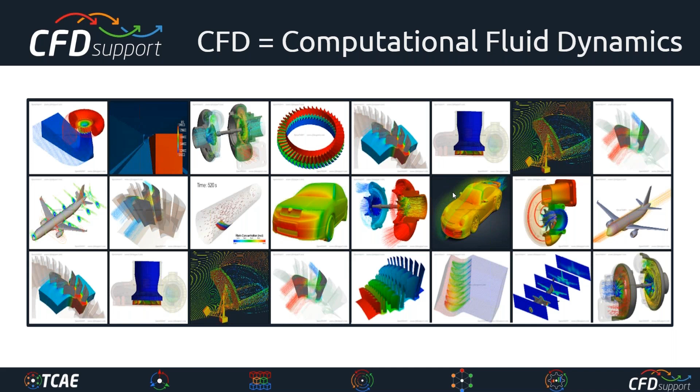I have to say we have a very strong team. In the last year, we have worked hard - in a matter of fact, very hard. When we met some difficulties, we worked even harder, and throughout the COVID pandemic, we worked harder still. These guys are very smart, and I'm proud of them. It's an honor for me to work with them. I don't know how they do it, but they did it, and it's here.

I'm happy to show you this TCAE, which is a comprehensive CAE engineering simulation environment. I guess you know that before we maintained TCFD, which now becomes a software module of TCAE. TCFD was very successful, and what had worked so well in TCFD now of course remains in TCAE.

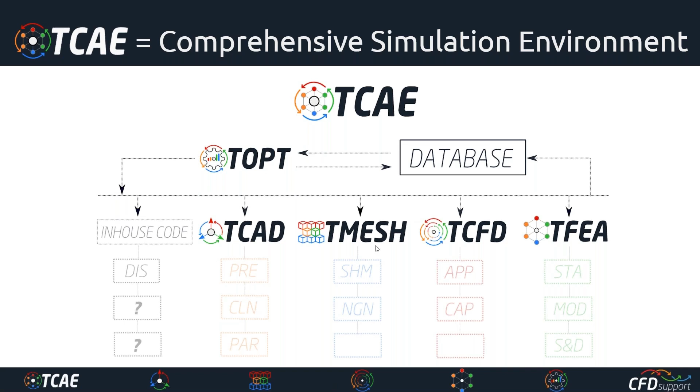Okay, it tells me now the webinar is full, so no one else can attend. So yeah, okay, it doesn't matter. Okay, let's continue.

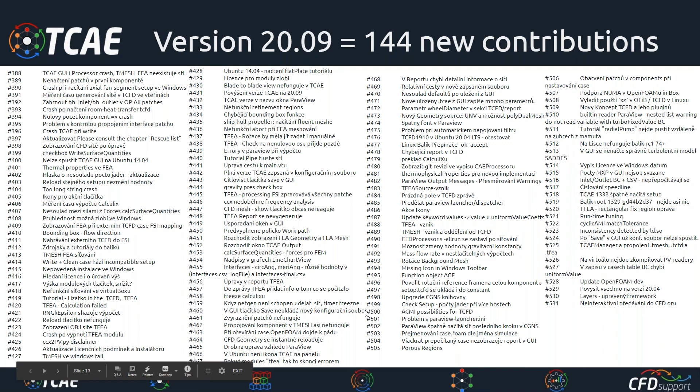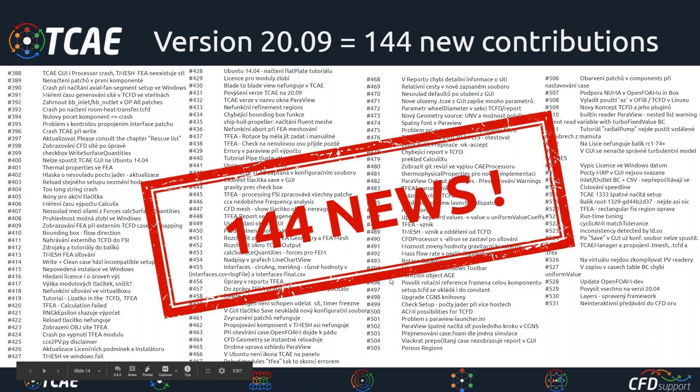Since the last release, which was version 1910, we have made so much work and so many little projects that we can't go one by one over it. So the list is very long. The development process has broken into 144 different projects. Some of them were just small issues, some of them were nightmares, but anyway, there are 144 new things, and I believe it's very useful. Maybe what's more important, TCAE is much more comprehensive than it was before.

As already mentioned, TCAE has a modular character, and the user can choose between TCAE modules and, if needed, combine them with many other software pieces available in the market. For example, you can take an external mesh from Pointwise and use it with TCFD. Or you can design a pump in CFturbo, create the mesh with TMESH, use TCFD, and do, for example, modal analysis in TFEA. Or you can run an optimization loop, creating the geometry in a CAD system, use, for example, GridPro for hexa meshes, then use TCFD and together use FSI with TFEA.

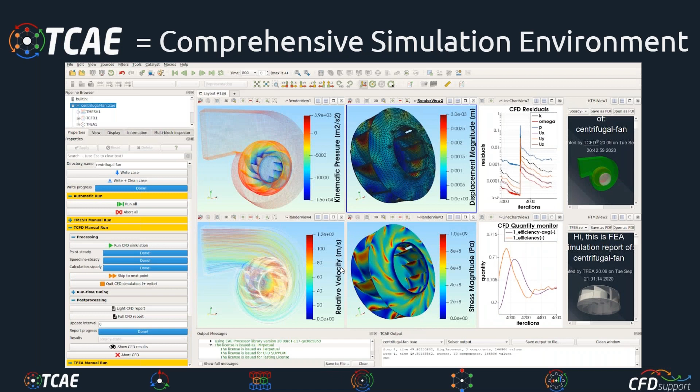I'll continue with, okay, this is the graphical interface again. I think there will be some other information about it later in the webinar.

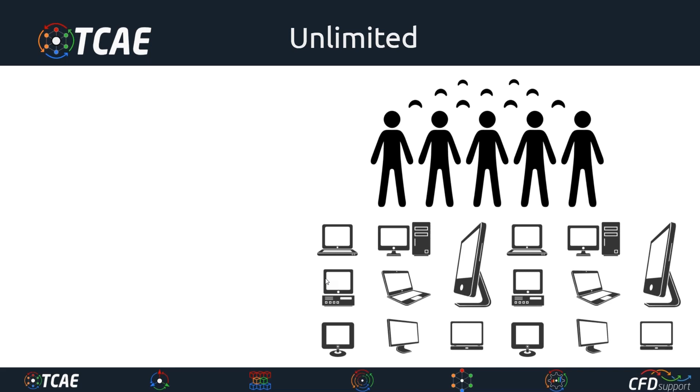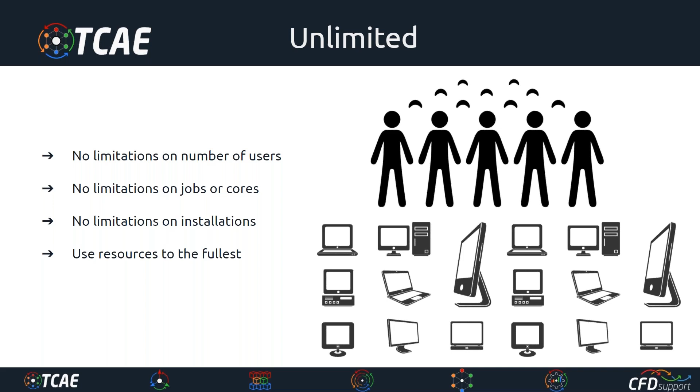TCAE is unlimited. It's definitely a big thing. There are no limitations on number of users, jobs or cores. There are no limitations on hardware installations. So it's very, very useful, and it can scale all your potential according to your resources. So the users can use their resources to the fullest. It's very important, and that means really a lot for our users, I have to say.

Okay, TCFD is definitely accurate. Accuracy is very, very important for us. We have clear focus on accuracy. TCAE is always aimed at particular applications, especially turbomachinery, especially external aerodynamics. Those are the two very best of TCAE, and we have created many benchmarks, and we are ready to prove that it's very, very accurate.

As I mentioned before, we don't believe in general purpose code. We don't believe that some code can do all the simulations of everything, or anybody can do anything. It has to be focused, and TCAE is definitely focused on special simulations. We are obsessed with accuracy. We have done a lot of benchmarks in the past, and we are ready to show them, and they're mostly available, and some of them will be made available still. And we believe that any successful project is a result of focus, skills, experience, patience, and dedication. So it's definitely not easy stuff.

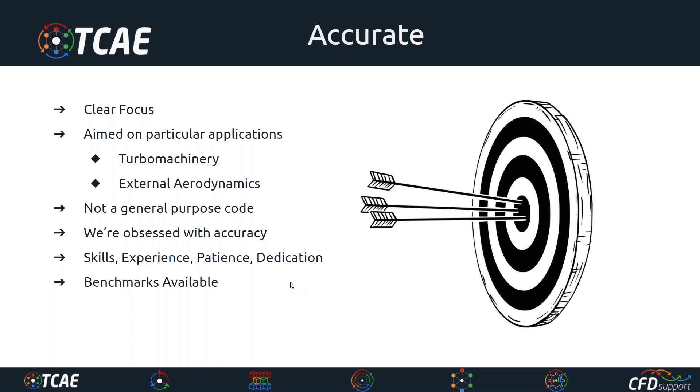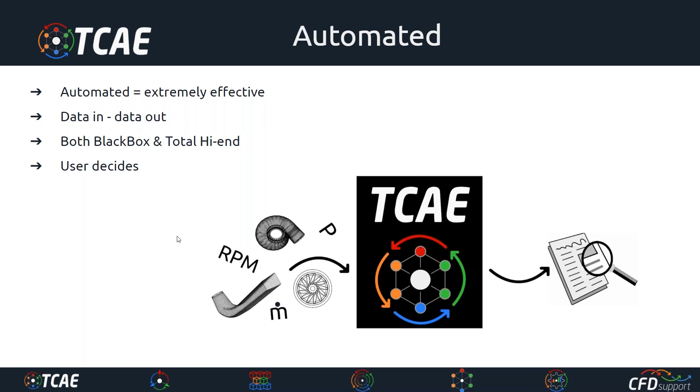Okay. TCAE is from the beginning developed in a way to fit modern engineering workflows. It's fully automated, and it can be used either as a black box, so the user puts the data in, TCAE does its job and the user picks the results at the end, or TCAE can be used as a highly sophisticated software where all the options are open. So I would say that the beauty of TCAE is that it's the user who decides how deep to dive into the theory, or not at all, right? So in these terms it's both. It's both black box and full scale high-end software.

Okay, we definitely believe in the importance of technical support. Support is coded in our DNA and also in the name of our company. For more than 10 years, we have supported engineers in achieving their goals. We are obsessed with professional technical support. We have a special process for it, which is powered by the OS ticket system.

TCAE is natively compiled for Windows and Linux. Yeah, it's ready for remote desktop access. ParaView, we have two versions of ParaView. One is without OpenGL, one is with OpenGL. One is with software rendering, the other one is hardware rendering, so you can access it from a remote desktop. Very, very useful feature. And of course, it runs in batch mode, and it can be run from another system or inside another system. So it's polymorph. It's a library if we want. So it's very, very useful.

Yeah, TCAE includes its own system of meshing. It's based on an automated system on SnappyHexMesh or NetGen, and also external meshes created in other software can be loaded. So we always leave this decision up to the user. Some users prefer automated meshing. Other users prefer external meshes of very, very high quality. So that's fair enough. We fully respect that. So it's the user's decision whether to go for external meshes or automated meshes. We use both, and we have good experience with both. This decision is always left to the user.

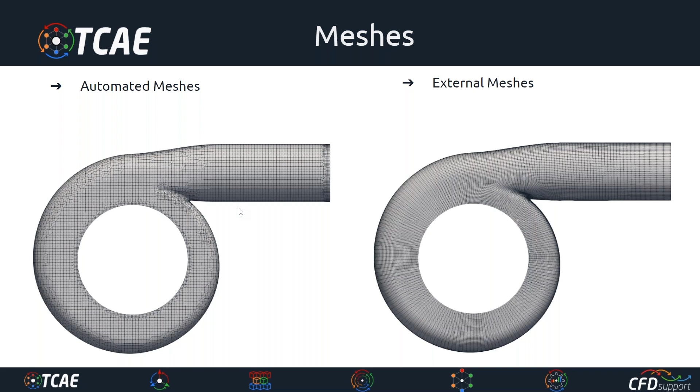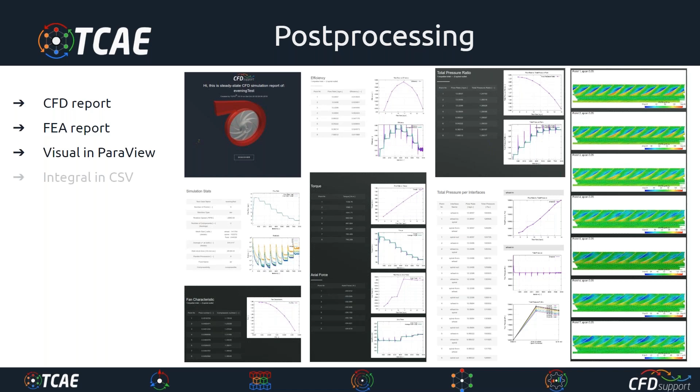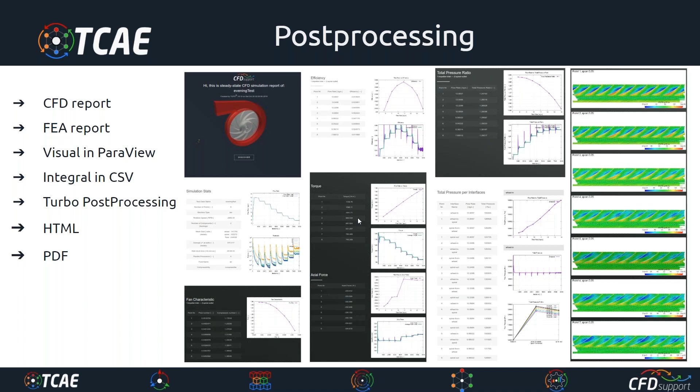And yeah, TCAE has strong post-processing capabilities. Every simulation that is executed in TCAE has its own HTML or PDF report with the results. The volume fields are processed if needed in ParaView, and the integral results are written down in CSV files and in the report, so anybody can find his way of visualizing the results. And also we have included a special turbo post-processing, which is also very useful for turbomachinery simulations.

Okay, so as you know, no software is ever finished. TCAE remains under continual development. It's always on the way. The development is user-driven, so we continually gather the requirements from our TCAE users. We evaluate them and keep adding them into the new version releases. We use a special system for code development in a team which is called GitLab. Very, very useful and very powerful stuff.

Okay, so what has been promised a year ago now turns into reality. We have a simulation environment which is under continual development, right? In the horizontal direction, we keep adding new tools, new plugins, new software modules, and we extend it by complexity. And in the vertical direction, we keep adding new applications, new capabilities, and new high-tech methods.

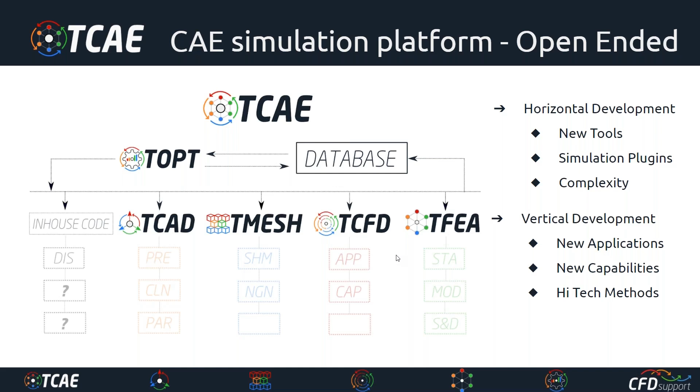Everyone is welcome to collaborate, so feel free to join us, feel free to help us, feel free to tell us what you need. And yeah, we are definitely on the way, and the way seems to be very, very good. Okay, so there are some examples.

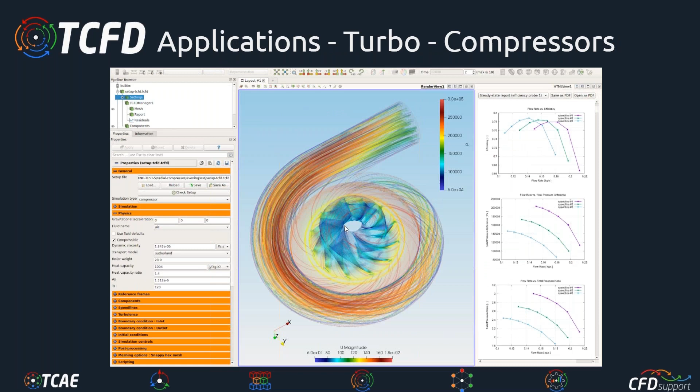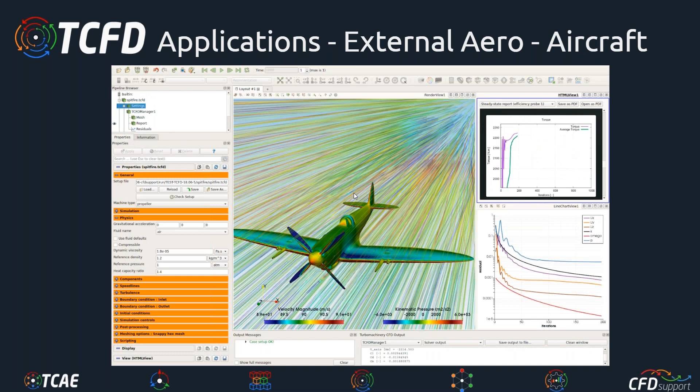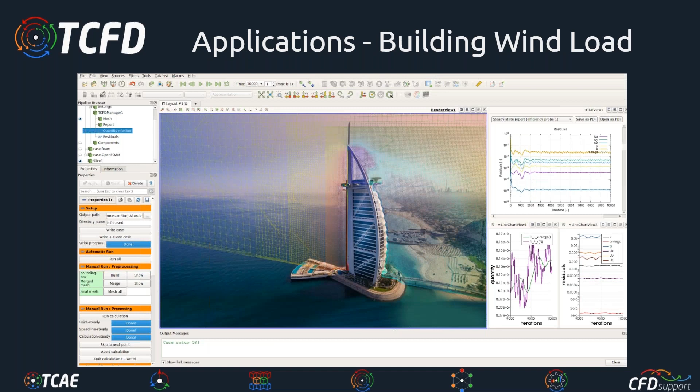I'll be very quick here. TCAE has always been great on turbomachinery applications like pumps, fans, hydro turbines, and also compressors, turbochargers, wind turbines, and also, of course, for external aerodynamics like cars, aircraft, valves, hydraulic valves, exhaust manifolds, intake manifolds, of course propellers and ship hydrodynamics, drone propellers, and also the wind load of many other things, comfort and heat transfer, etc.

We already did quite a lot of benchmarks where we really compared in detail the simulation results with the real physical measurements. Many of them are available as case studies in PDF. You can see what software combinations have been used.

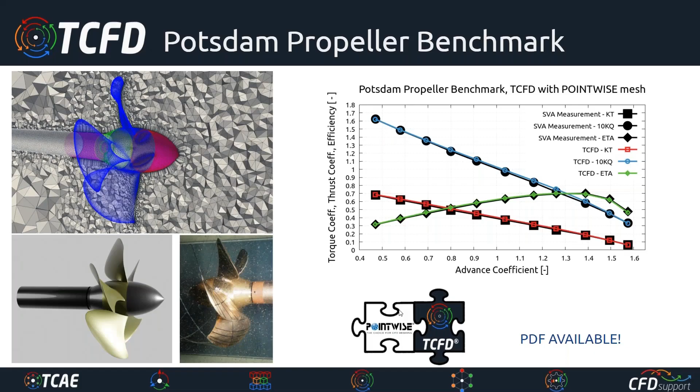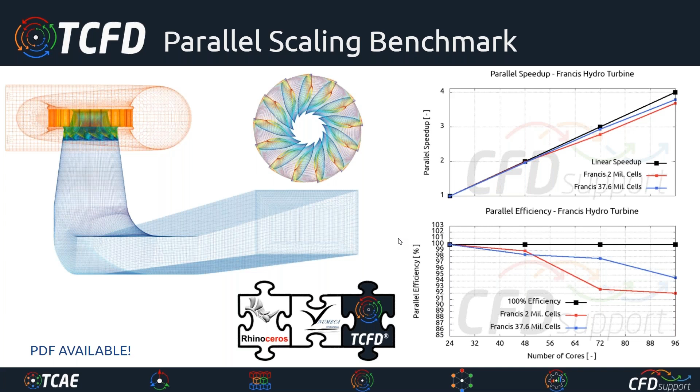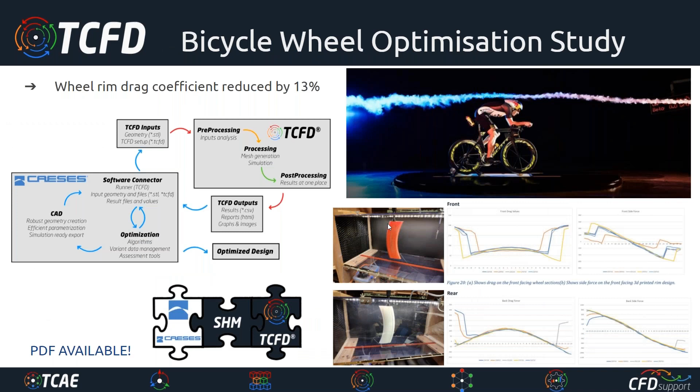So I'll be very quick here. It was the Potsdam propeller with Pointwise, Francis turbine, fan benchmark with ZVVZ, turbocharger, TCFD of course scales perfectly. There was a Spitfire simulation, Ahmed body, and a couple of optimization studies with CAESES and also with GridPro. And we also have tested and benchmarked the FSI function, which we will speak about sometime later.

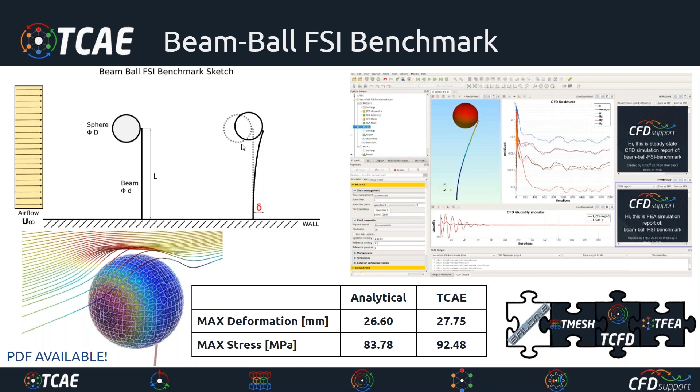And this would be it. I'm not gonna torture you anymore.

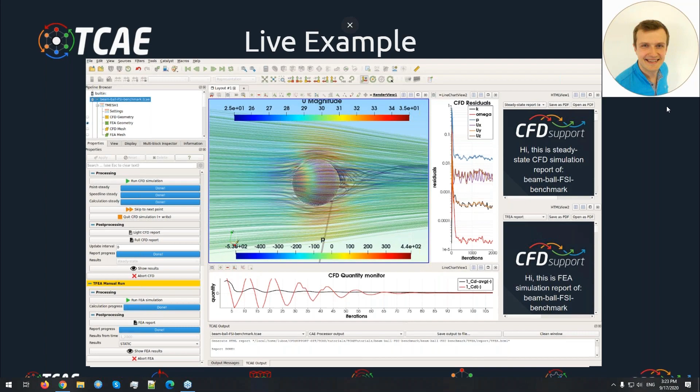And here I need to click a few times, and we will ask Radek if he is available. So Radek, do you think we can hand over the presentation to you? Yes, if you already finished. Okay. I did what I did, and I think I finished. Okay, so the stage is yours, Radek. Just tell me when you can see it. Yeah, okay. It takes some time, but very soon we should see it.

Okay, so thank you, Luboš, for your part. You introduced the general things about TCAE. Can you see my screen now? Yes, we can see it. Okay, so now I will show you a real example. I'm not going to show you every new feature, and this is not a training webinar. This is just to show you what is new, how the new interface looks, how the modules are managed, and I will show you the principles on, let's say, four new tutorials.

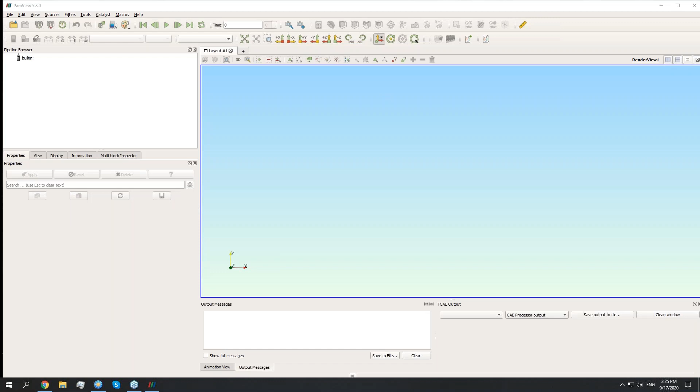So first I will open TCAE. The installation is very standard, the same way as the previous TCFD, the old version. Just a wizard in Windows, or unpacking the zip file in Linux. As you can see, the graphical user interface in ParaView looks very similar, but there are several new features and a new, easier management of the cases.

So let me start. It looks very similar, except maybe the colors; I think it was gray or brown. Now it's in blue, and the advanced mode is in gold. And mainly what is new in this pipeline browser, you can see that everything is already there. There is no TCFD manager to manage the simulation. Everything is within one item here.

This pipeline browser is split into three modules: TMesh, TCFD, and TFEA. So this is a new framework of working with TCAE. I will load a preset example which is delivered within the installation. I will go to the TCAE installation on the C drive, the current version, and here you can see a few tutorials. I will go through all of them, and on this piping system, a pipe elbow, I would like to show you how all 3 modules work. So I will load the case to speed up the process.

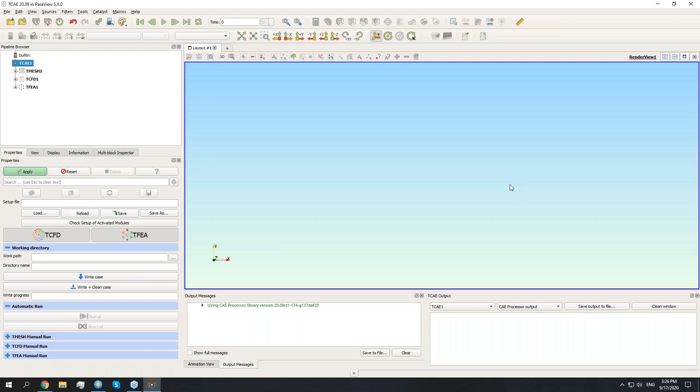So now when I load it, everything comes up. A lot of windows appear because each window is dedicated to each part or to each module. So let's say I will make it a bit easier for now.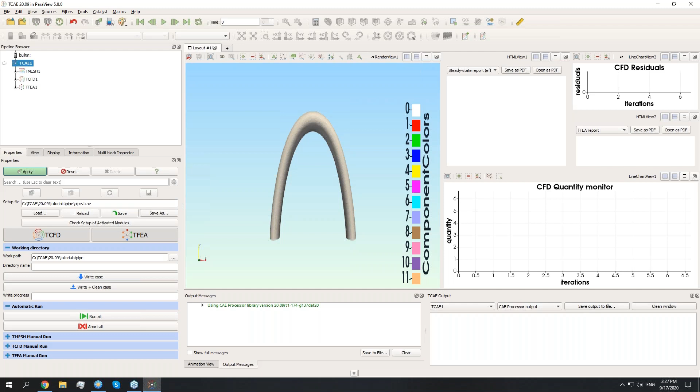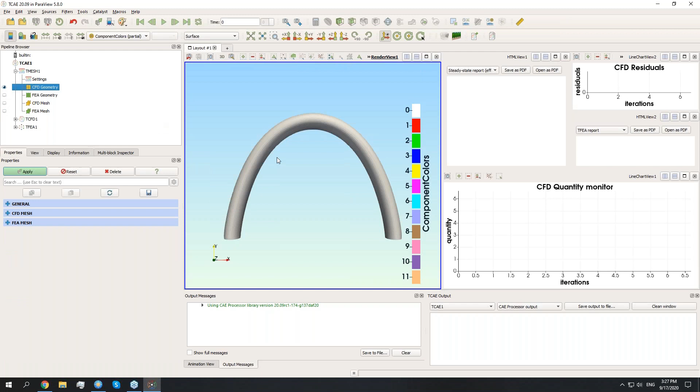So first of all, we always need to start with the meshing part, of course. If I unclick the T-mesh, we can see there is a setting for the T-meshing, both for CFD and FEA purposes. You can, for example, always visualize just the input to the CFD, so it's the same as in TCFD. Either you can load the STL and set the CFD meshing here as usual, using the snappyHexMesh parameters, or you can use some external mesh in different formats. So this is almost the same as for the TCFD.

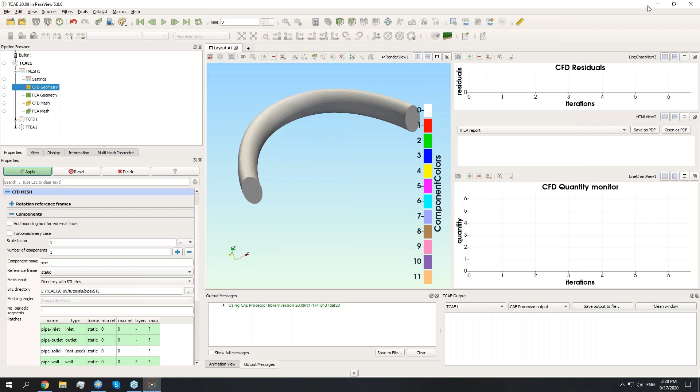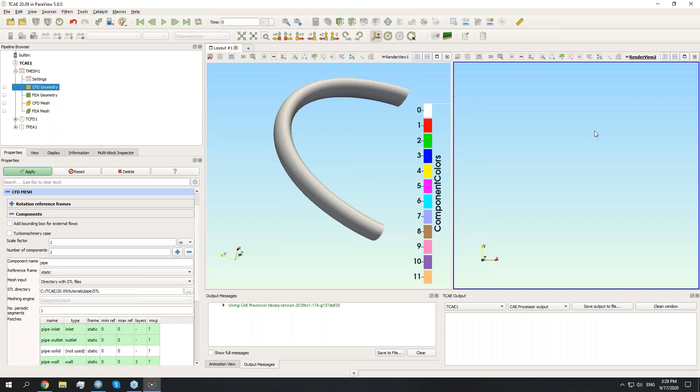But now, okay, I will make it much easier, just so you can follow what I am doing. So this is the input for the CFD mesh. Yes, this is the STL. If I would like to show you the input for FEA, I can open a new render view and visualize the input of FEA. It looks very similar, but I would like to do the finite element analysis of the solid.

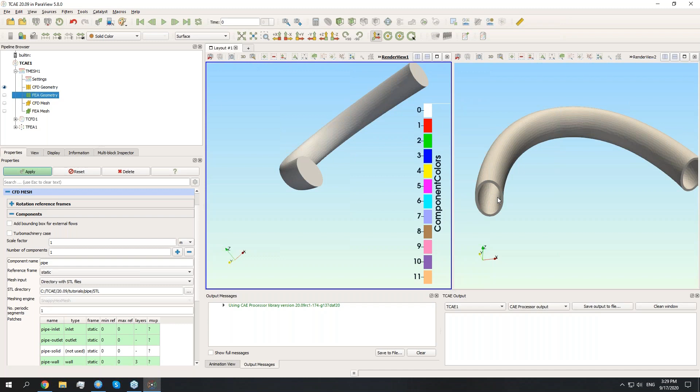And of course, there is an FSI interface which can communicate one way at the moment. So it can take the results from the CFD and map them on the mesh for the FEA analysis, for example the forces or temperature, and so on. So first of all, we need to mesh the domain for CFD and the domain for FEA, and then we can run the simulation.

The FEA looks very similar for these purposes. The input is again the STL geometry, so it's very similar to the CFD mesh, but now we do not have snappyHexMesh, we have the Netgen meshing tool. So basically, you just set some minimum and maximum sizing of the tetrahedra, and the meshing is done automatically based on the input geometry. Or you can also put in external meshes in Netgen format or in Abaqus format.

Okay, then the management of the meshing. So now I would like to mesh these geometries. I can go to the top, to the first item in the pipeline browser, and this is the TCAE manager, we can call it, using which we can manage the whole workflow from the simulation point of view. So I will create a new directory in which I will store the whole project, let's say my webinar case. I have to write the case, and now I can run everything by one click.

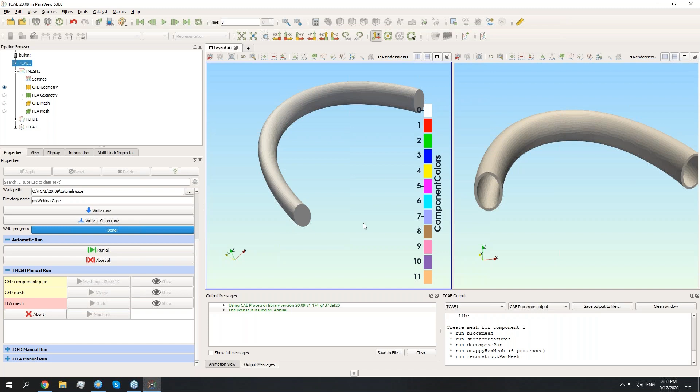But now I would like to go step by step. So first we should do the meshing for CFD, then the meshing for FEA, and then run the TCFD simulation, and then the TFEA simulation. Okay, so I will click here to mesh all. So now the meshing is processing, the mesh is being created, and at the end I can immediately show the mesh here.

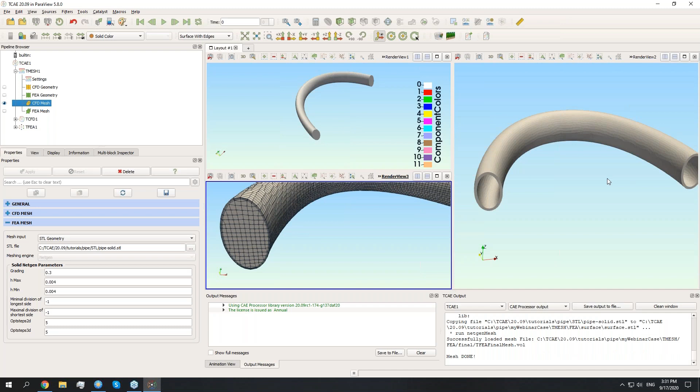So here you click on the eye next to the CFD mesh, go back to the manager and click to show one of these, because these are the same. And here, if I visualize this with edges, we can see the mesh. It's a coarse mesh for training or runtime purposes, to show you really how it works at runtime. So this is the computational mesh for CFD, and for TFEA.

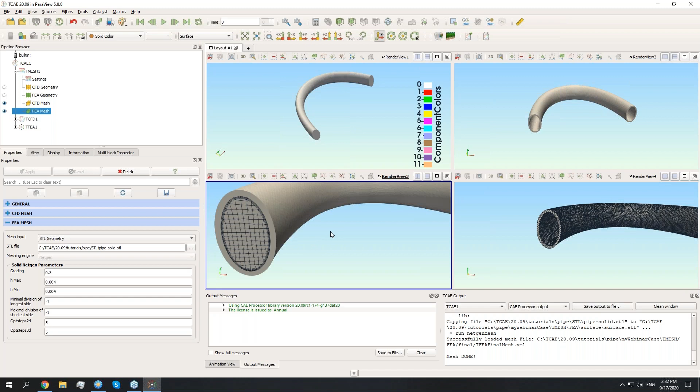I can click here to visualize the FEA mesh, go back to the manager, click here, show FEA mesh, and this is our FEA mesh. This will be used for the FEA simulation, and this mesh will be used for the CFD. I can show you both of them in one render view. So the orange one is used for the FEA, this one for the CFD, and internally the forces from the CFD acting on the inner part of the piping wall will be put as the input for the FEA analysis.

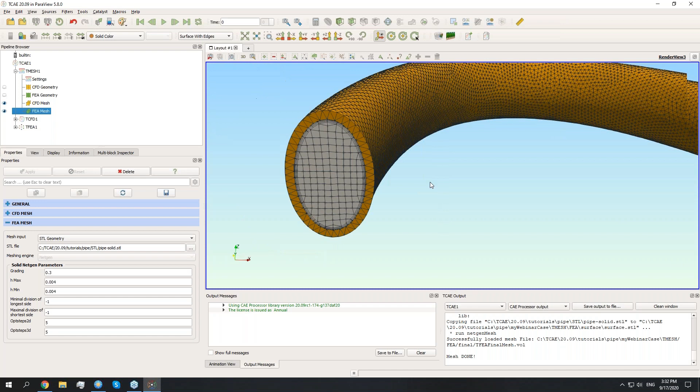Okay, so now it's time to run the simulation. So now let's go. I can go for the TCFD manual run. I will run the CFD simulation, and I can wait several seconds to perform the simulation. Anytime, as usual, I can show the graphs.

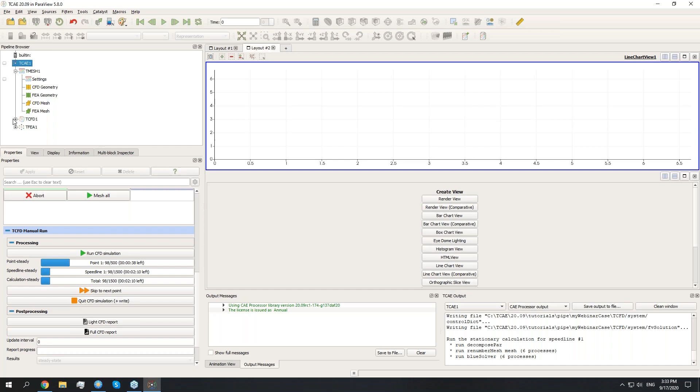So if you click to the TCFD, there are several items. For example, I can visualize the residuals here, and in the second line chart view, I can visualize the quantities, and in the display part here, I can visualize, for example, let's say the total pressure difference for the piping system. In the view, again, I can adjust the axis.

So let's say use the axis, it's piping, so there will be pressure loss. So I think 5,000 pascals to 0. Okay, this is a good view. Again, the standard TCFD approach, so we can simulate several points within one simulation.

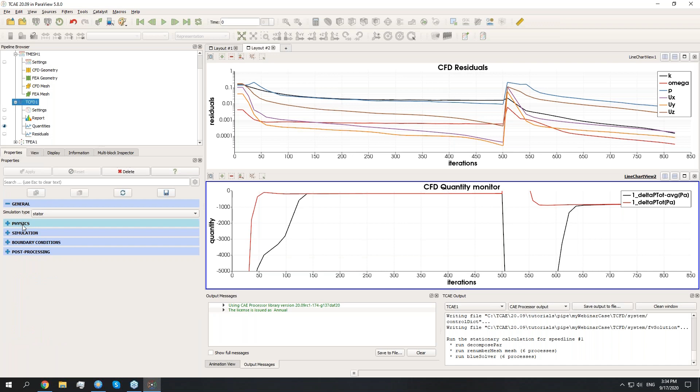So if I go to the TCFD setup, it looks very similar for those who already used or are using TCFD 1910. So standard management, we have several points to be defined: standard fluid, multiphysics, turbulence, solver setup, boundary conditions. Here are some new features. Maybe I will show you for another example.

So now we can, for example, set for each wall different boundary conditions, different wall functions. It's not per component, but it's per patch now. Similar for temperatures and so on. So this is much more easy and intuitive. Anytime you click any part of the component, it is visualized in the render view to know to which part you're assigning a particular boundary condition.

So I think the simulation is almost finished. Let me see. Yeah, the last iteration is performing. After the simulation is done, I can create a report, and immediately I can run the TFEA simulation, because the CFD results are already written. So the TFEA module can take the data from the TCFD module, transform it, and map it as boundary conditions for the TFEA simulation.

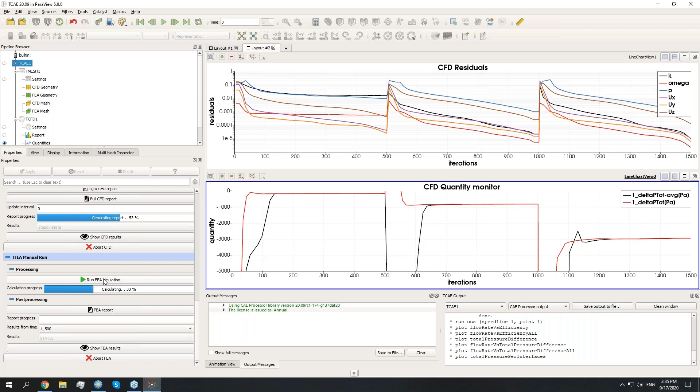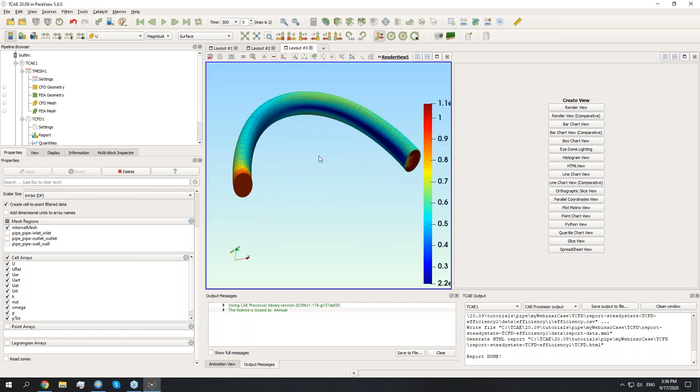Okay, meanwhile, anytime we can show the results as usual. So I can split the view. So here I can show the CFD results. If I click the show button, here we can see the pressure distribution or any other quantity which is evaluated. So this is the CFD results. So we have 3 points.

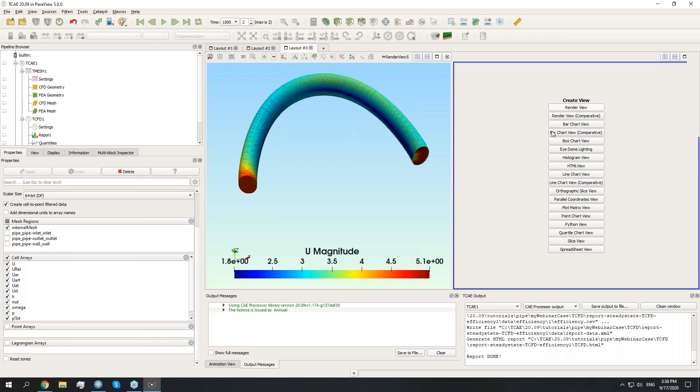So for the last point, for example, where the flow is pretty quick, we will see which deformation and other quantities will be shown in the FEA analysis. So let's go here, just check if the simulation is still running. Yeah, the second point is now simulating. So maybe meanwhile I can show what can be set in TFEA, which is really new.

So we have, let's say, 3 menus. In FEA analysis, which is the main part of the setup, we can see which physics we would like to model. So there is a thermal analysis, if we have temperature information, so for compressible solvers we can apply it. Fluid structure interaction, which is for all the cases which you would like to connect to TCFD. The source information is where to take the CFD data.

So I think in 90% of cases you will use TCFD as a CFD tool and TFEA as a FEA tool, or you can also use some external directory with CSV files, which is automatically generated, or you can generate them also in the TCFD module itself. Then you just pick from which patches you would like to take the data for the mapping.

For rotational framework, you can also include the rotation. So for turbomachinery, you can also take into account the rotation of the solid and, for example, displacement and stress analysis, which takes into account the rotation and these inertia forces. Map forces from pressure, of course.

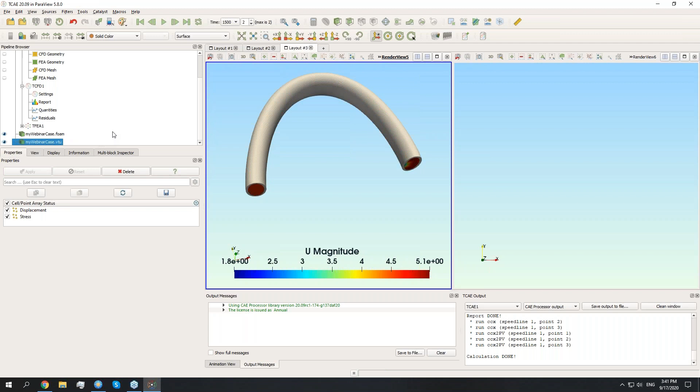So it always puts into the pipeline browser the results from the given time frame. So if we have more points, we can visualize any results which are connected to any point of the TCFD simulation. Okay, so I can hide here in the left render view and show in the right render view. So this is the FEA mesh, and for example, I can visualize the displacement in meters. So we can see that the displacement is something like 1.5

centimeters. What is also nice, there is a nice filter which can really visualize the displacement. So this warp by vector filter can show us what is the displacement compared to the original shape. Yeah, so this is the real displacement of our current setup for the pipe elbow, which is made from some kind of rubber. And in the same way, we can visualize the displacement, the stress, the maximum stress, and its distribution along the whole geometry.

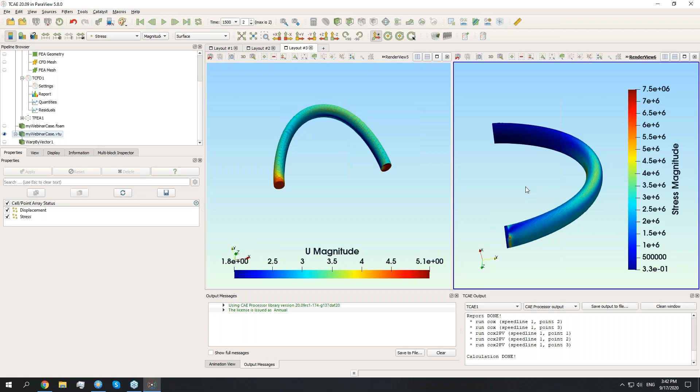So the stress magnitude, and if we have the modal analysis, we can also see some frequency analysis parameters. And for both simulations, of course, we can visualize the report directly here. So here I can see the report for the TCFD, and here I can visualize the report for TFEA, which I haven't yet generated. So I need to click FEA report. So I will generate the FEA report, and it is very similar to this CFD simulation report.

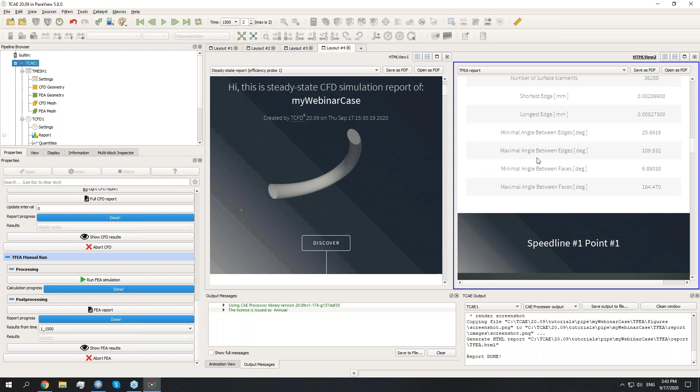So it includes the basic information about the simulation, which material was simulated, about the solver, mesh statistics, how many points, elements, and some mesh quality parameters in the sense of minimal and maximal angles, and of course the static analysis, the parameters maximal, minimal displacement in each direction, and so on. And the same for the stress, of course, maximum stress and the stress in each component, and the information is placed for each point.

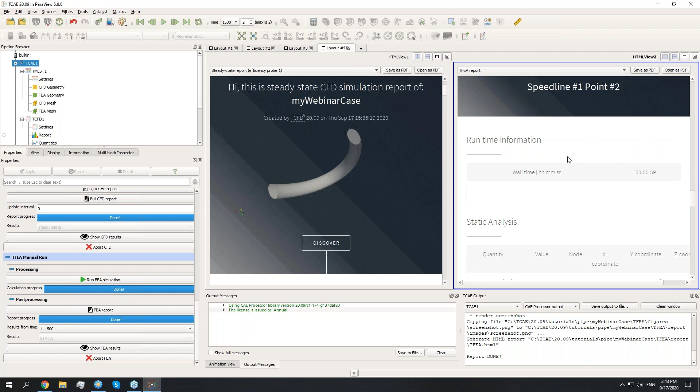So the points can be connected to the points in the TCFD simulation. So for example, here the total pressure difference could be of interest in this piping. So for each point, we can see the deformation of the elbow in the report of the TFEA. Yeah, so again, this can be run automatically by one click. So this can be repeated. So we can change just the input geometry, repeat. So everything can be put into the optimization loop. The same works in Linux, in bash mode, and so on.

So this was the typical example of how to work with all the modules. So the meshing for the FEA, for CFD and TCFD setup remains almost the same, and you have a new module available using which you can perform the FEA analysis. So let me show you another 3 examples.

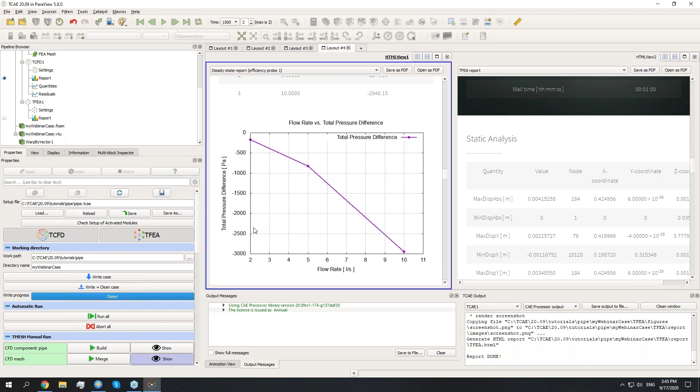So one example is this simple benchmark case. This was this beam ball, so a ball which is placed on the stick, and the forces from the CFD analysis are prescribed on the stick, and we will see what is the displacement, and we compare it to the analytical solution, which is well known for the simple shapes. So again, the input for CFD is standard. So we have some kind of virtual tunnel. We can apply any refinement near our objects as for standard external aerodynamic applications.

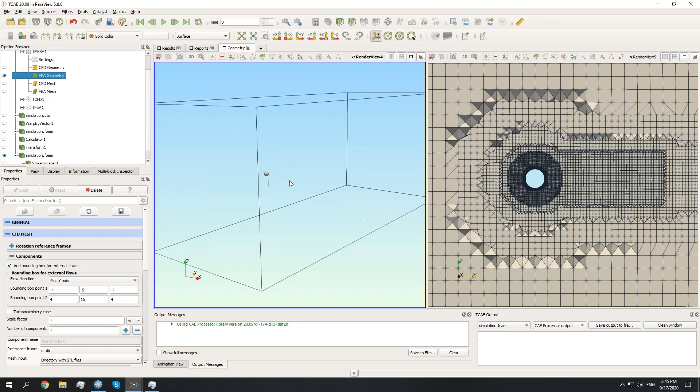And the input for FEA, which I can visualize here, but I think I need to zoom it. So this is the ball with a stick, right?

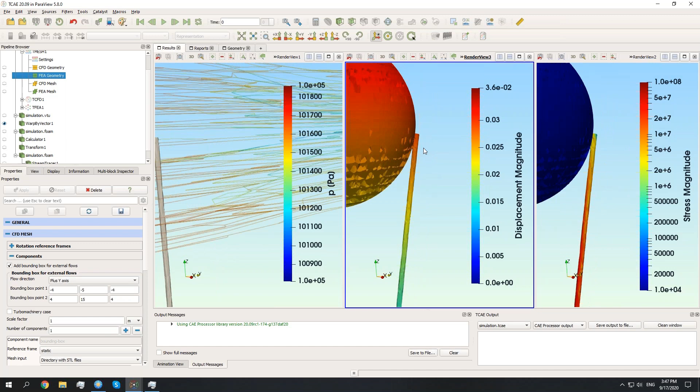You can analyze it visually as you want, and also inside the reports you can see everything you need, so maximal displacement, but for our benchmark we need to read the results from the top of the stick. This can be done very easily - I will just click here and read the displacement from this table.

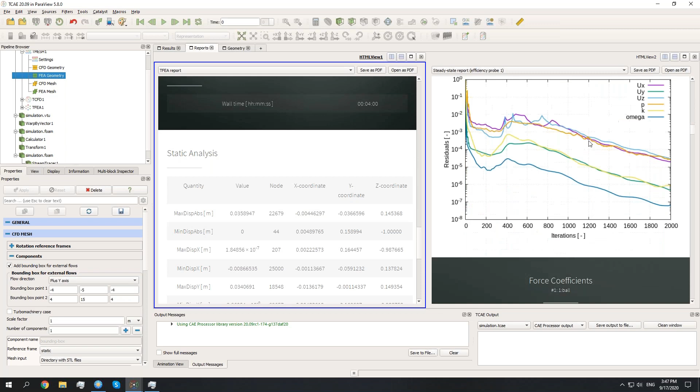And the same report, of course, for the CFD simulation. I don't need to go through the whole report, these are standard parts of the HTML report.

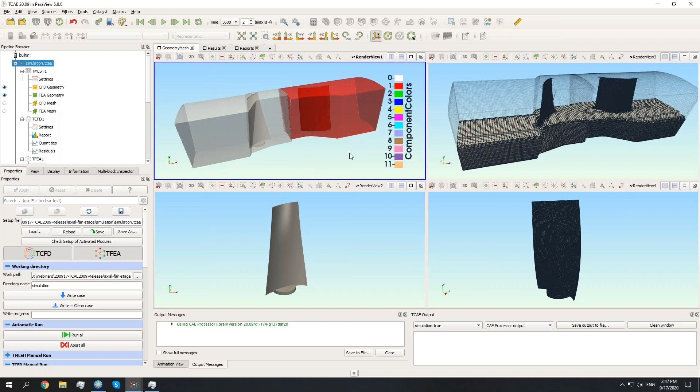Then I have two more examples. First one is the axial fan simulation, so this simulation includes the rotation - this is the example of turbo machinery. Again, the input geometry for CFD, standard segment geometry is put as the input.

For FEA analysis, there is the blade, which includes the part that manages the rotation, for example for the axial fan - this axial fan with adjustable rotating blades. We can perform analysis by simulating CFD and then adding also the solid part and perform the analysis, including the modal analysis in this case. We can set how many eigenfrequencies, meaning frequencies which can impose some oscillation of the rotating blades.

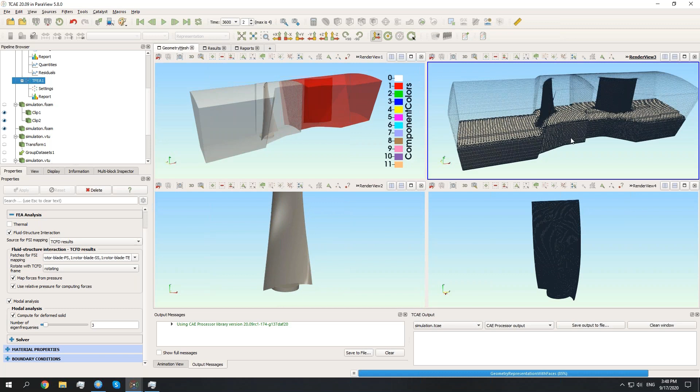Again, the CFD mesh and FEA mesh are generated, and then we run the simulation to get the results - the pressure distribution for each point. The simulation includes 5 points with different flow rates or different total pressure differences, and for each point the pressure distribution is taken and mapped to the FEA analysis.

Each point is simulated again, and we can compare the stress magnitude. The flow rate is decreasing and the pressure drop is increasing, so for the higher points the pressure load is higher. We can see that the stress magnitude is rising for each point with a higher pressure drop, of course.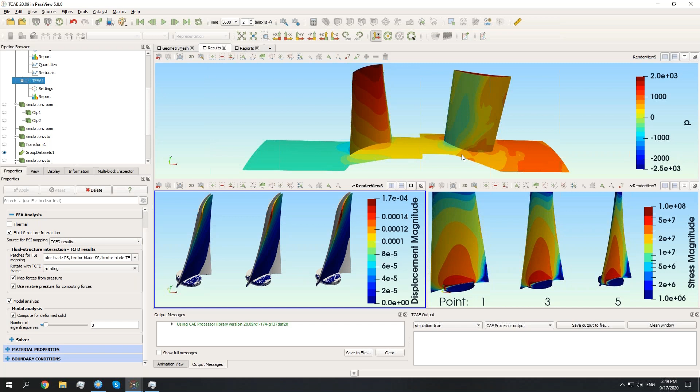And again here we can visualize the real displacement - I don't know if it's visible. The colored one is the standard shape of the blade, and the white one is the transformation, which is the magnitude, shown more forced to be visible. The displacement is less than 1 millimeter.

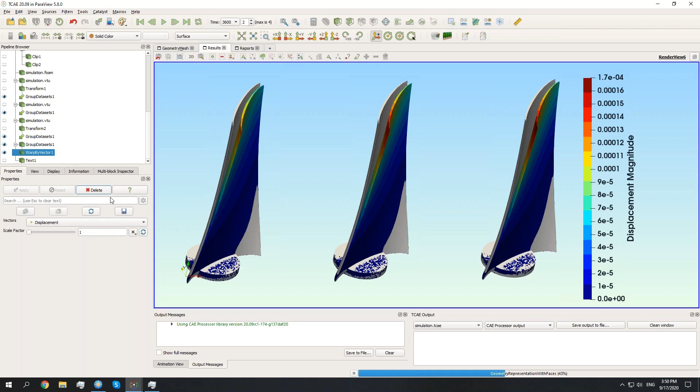This visualization is done by warp by vector and it's multiplied by 1 - so this is the real displacement, which is barely visible. We can multiply this displacement to be nicely visible and see the topology of the deformation more clearly.

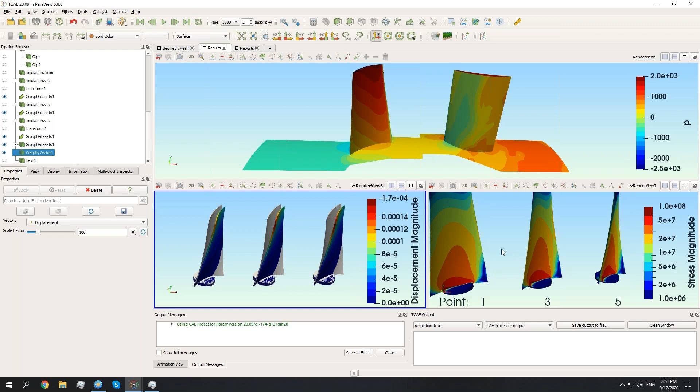Now you have many options how to visualize it. ParaView itself includes many filters, which in combination of the results with CFD and FEA gives you a really nice tool for visualization and analysis of the results. And similarly, we have two reports.

I will go through the FEA reports, and what is new is this modal frequency analysis. We can see 3 based frequencies, which make trouble, or which make the whole simulation oscillate - some participation factor, which is the magnitude of the oscillation in each direction for each eigenfrequency, and some other frequency parameters, which I think there's no time to describe in detail.

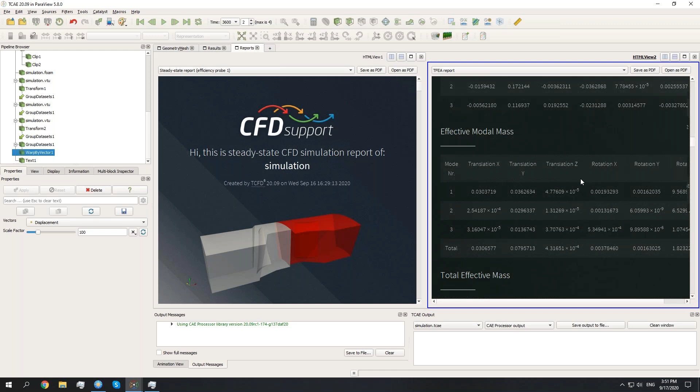So this is again done automatically and can be applied on any turbo machinery design - for example, it can also be applied on the centrifugal fan. Again, the principle is the same: CFD geometry, FEA geometry, the solid of the wheel, CFD mesh, FEA mesh, run the simulation, and we can see the results.

Again, the mapping is done for the whole blade, the whole wheel - although one part belongs to the rotor part, for example, and the second part belongs to the spiral part, any part can be assigned to perform the FSI analysis, which you can do here. So any part, any wall can be put as a mapping source for the FSI.

So this is the result of CFD simulation for the first point. You can again visualize any flow data and apply any filter, and then you can see the displacement, how the wheel is deforming, and of course where the results are, and the stress analysis and what the stresses are.

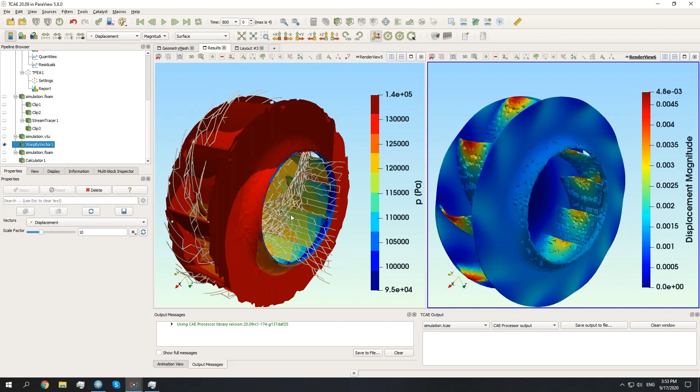So again, this one is the real displacement, which is really small, multiplied by 10x from the original. I can visualize the original shape. So the deformation is half a centimeter, and I think the diameter of the wheel is half a meter, so it's a huge radial centrifugal fan.

So you can really play now with what you want, and you have a lot of new features available to perform your analysis into more detail. And maybe the last new thing I'd like to show you is in TCFD, the approach to set the boundary conditions, which is really nice.

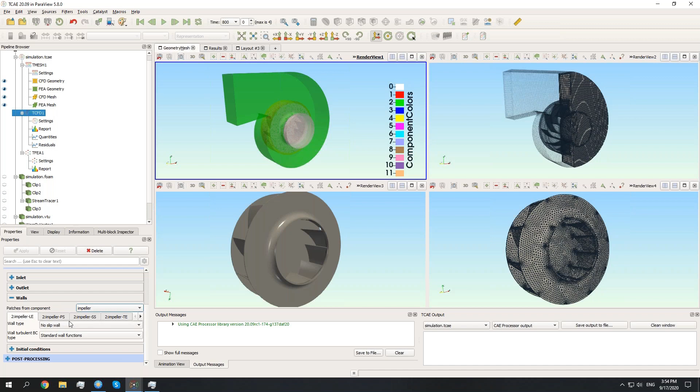So for example, for each wall separately, I can choose the impeller. Per each patch, I can take the impeller pressure side, and you can see that each part is visualized here. Similarly for the spiral—if I take the spiral tongue, you can see you are now adjusting the boundary conditions. For example, the standard wall function I can prescribe, and I can also prescribe the slip wall or no slip wall—wall without friction, wall with friction, per each patch in your domain.

And similarly, if you have more inlets, you can assign per each inlet what your boundary conditions will be. Okay, so I think it's 5 minutes to 4.

So now I think it's time for your questions. I'll go back to Lubos. Lubos, are you awake? Are you there? Yeah, I was all the time awake because it was very interesting to watch this from this perspective, and I like it. It was great, Radek. Thank you for your contribution, and let's keep it this way.

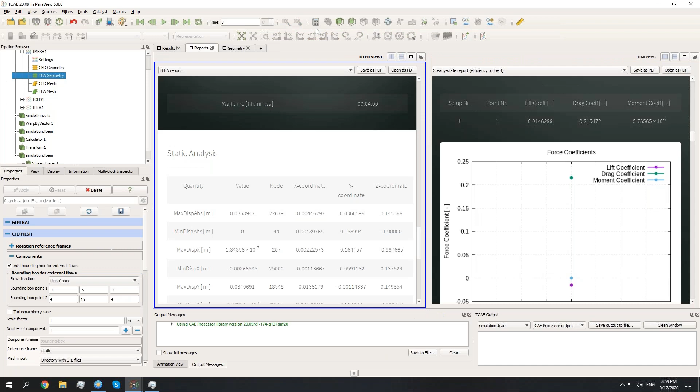Let me show you this, for example. It can be, yeah. So I can create an animation based on any parameter which is here. I hope I have many windows open, so I hope the animation will be visible to you. Here I have the animation view, so I can add a new parameter to the animation.

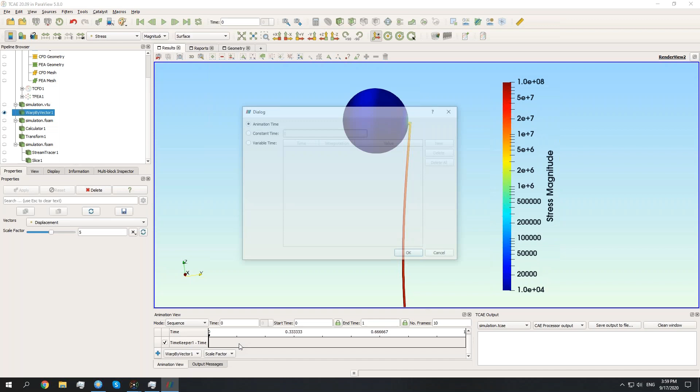Let me see. Okay, here. New one. Zero. Okay, apply, and let me see. Maybe I have too many. All right, and now if I run and save the animation, I will try to run it.

So you will see. I don't know if you see anything. Maybe it's not much. I think it's not that important, but yeah, there are definitely... it is possible, yeah.

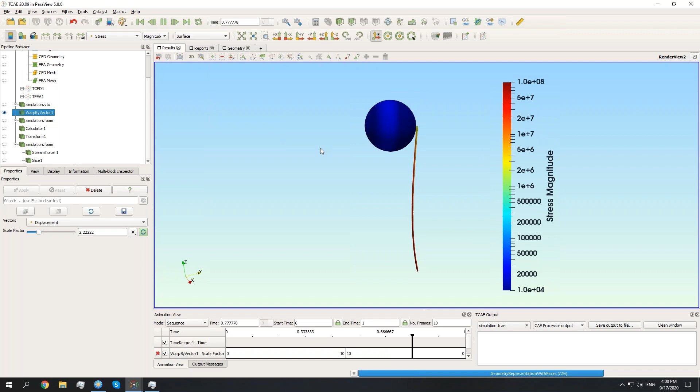I have a couple of questions about multiphase. I'll be honest here, for example Rasoul is asking - TCAE, it is a good example. TCAE doesn't do multiphase simulations, because we think multiphase simulations are very difficult. I mean VOF and Euler and these things. It does multiphase actually in the cavitation modeling, but these VOF and Euler...

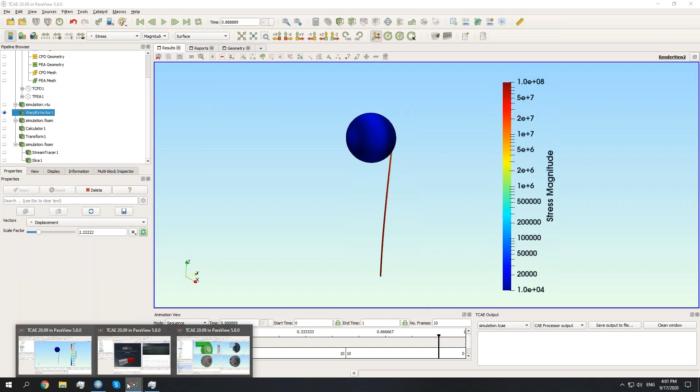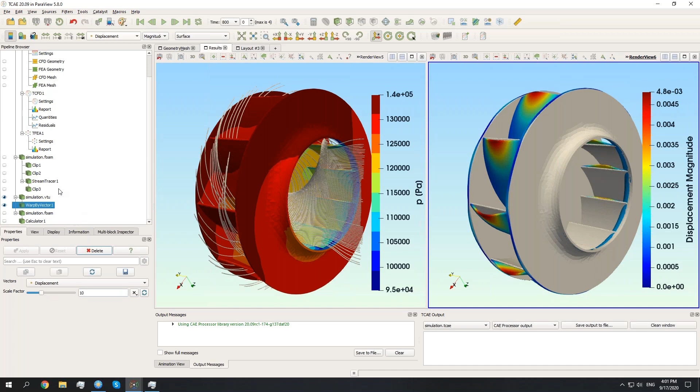We don't think it's accurate at all. And what's not accurate is not for us. So we leave it for other people, for other tools in the market. We do classical single phase modeling, which is accurate. It can be measured, it can be really tangible, it really works, and we do what's accurate and what works. So TCAE is not for multiphase, I would say VOF and Euler simulations, at the moment. Maybe in the future, perhaps we will start a new project on it, but we did not do it yet, and it's not even behind the door.

Okay. What else? There are so many questions, and we are already running one hour and something. So Radek, do you see any question you would like to answer? There are many, really many of them. Don't worry, we will answer them, but still not there yet. Can't make it here. Okay, I can see one question.

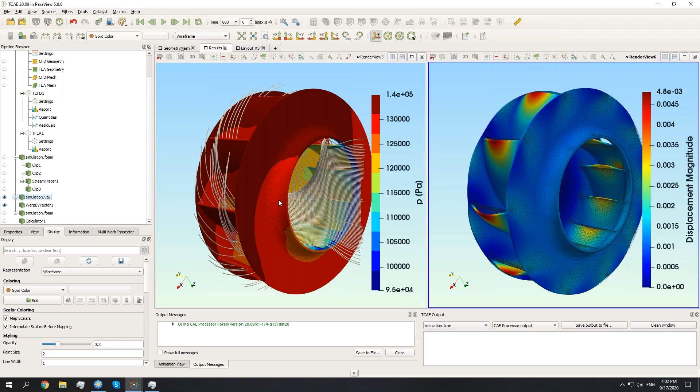Yeah, okay Radek, what do you think? I think we should stop here. Maybe we will answer all the questions after the webinar, just not to bother the audience too long, and we will answer all the questions afterwards. Yeah, okay, let's get back to the presentation, which is approaching its end.

So can you see my screen? Yes, we can. Okay, very well. Yes, very well. Okay, so we even made this Q&A. So we are approaching the presentation to its end.